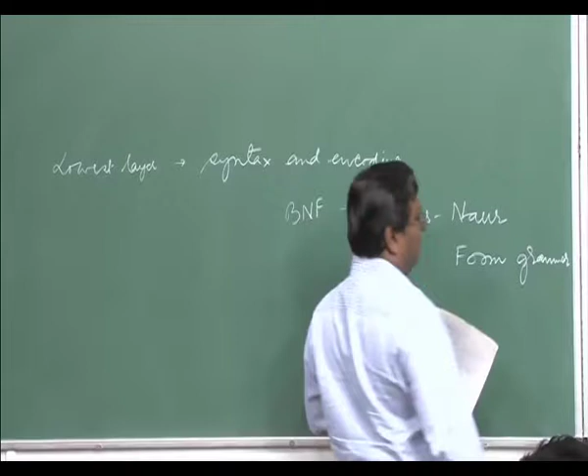So there is a generic definition, and this can be done through a grammar, and this grammar is known as BNF. It is something very similar to ASN, abstract syntax notation. Let me write down the proper spelling. So this is a formal way of specifying the syntax.

I will give an example of this. We will specify in our own way, and most likely that is BNF. Once you have this specification, at least you know how to form a request and how to form a response for every request. There can be multiple requests and multiple responses which are permitted.

So once this abstraction is clear, you know how the message will be formed. It's like how to write a letter. There will be Dear Sir, there will be address, there will be date, then you will write how are you, whatever it is, then you write whatever you want to say. After all that preamble, you will say thank you, goodbye, your name. It is a format, it is a syntax. You will be using English language or you will be using Urdu or Hindi.

That is a kind of encoding, how it will be depicted in text. You might write in Roman script but you are writing Hindi language, that is possible, we do that once in a while. So all that specification is given by this. So once the letter is written, closed, sealed, what has to be done with that?

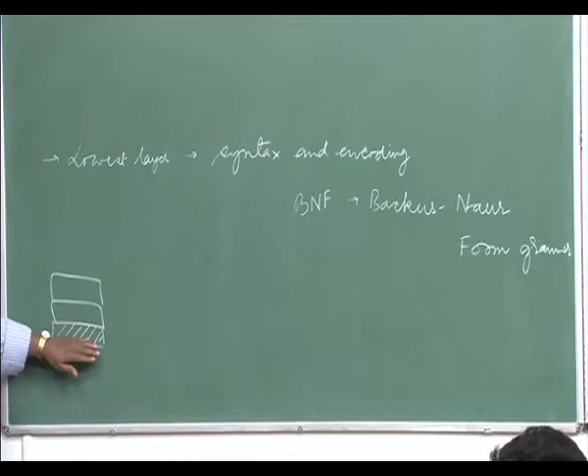So the next layer talks about how it will be transported. So the next layer will be transport. This is the lowest one, so next on top of it, layers are like this. Whatever functionality or abstraction is provided by it need not be known by this guy, this guy just passes on the information and this takes care of it. Actually this is the way it is going to happen.

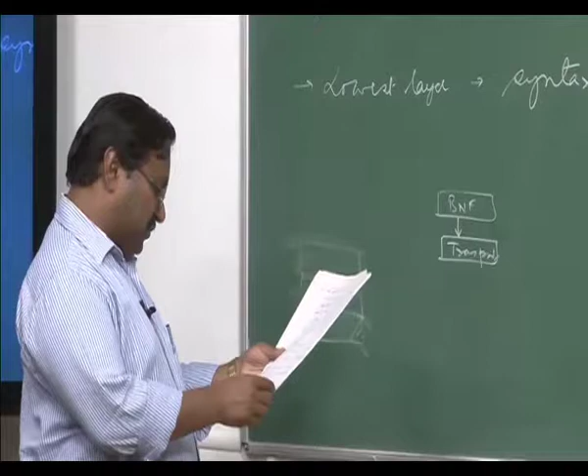Whatever you are going to generate with this BNF grammar specification, the message, this will be passed using a transport. So transport layer can be UDP, can be TCP, can be HTTP, or can be anything. It is basically the message being encapsulated and then being transported over to the other person. So it defines that particular transport, and similarly how the responses will be sent back. So this can be any one of those.

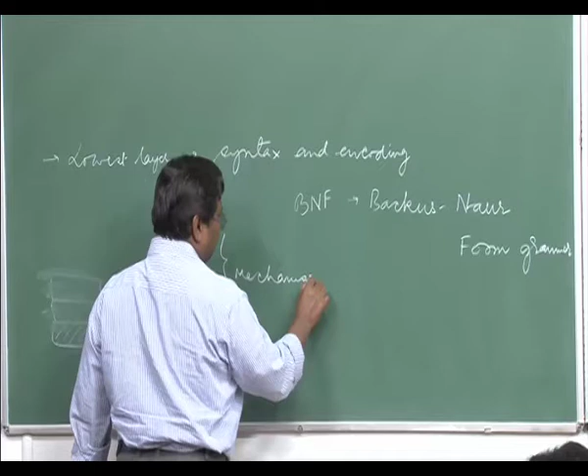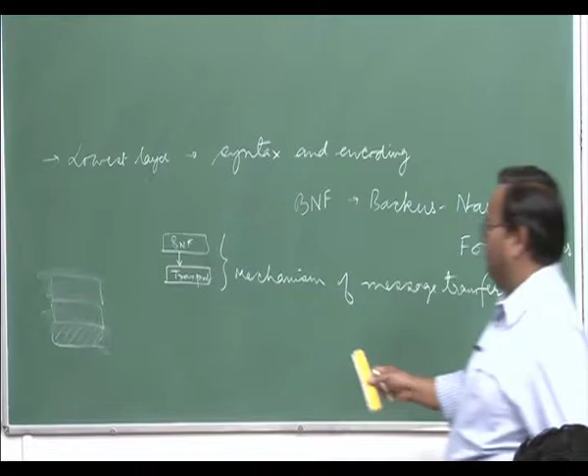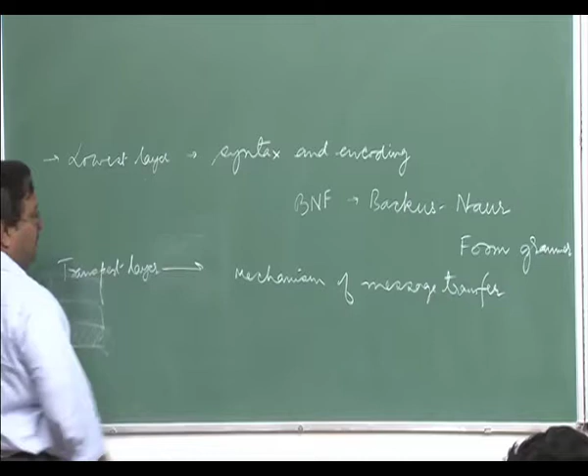This is basically the mechanism of how the message will be transported, how the message is formed, and how the message is transferred from one entity to another entity, that is the transport layer. I should not call it a lower layer because it is not running on top of it actually, because whatever you create, that becomes an entity for this. These two are separate, but that is the way it has been written, lowest and transport layer in RFC.

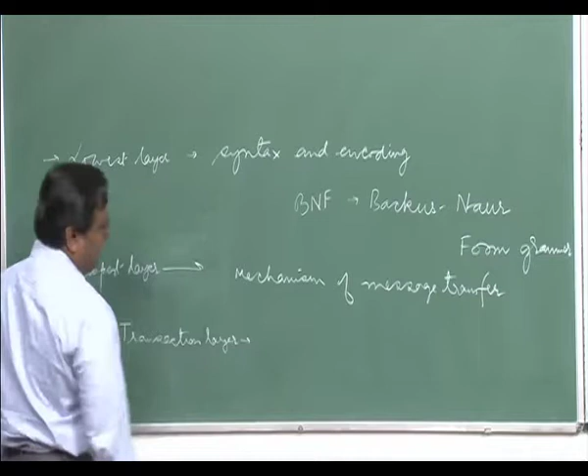Then there is a third layer. They do not write bottommost, upper layer kind of thing, the structure is not used the way it is used in networking. Third is what is known as the transaction layer. What does it mean? For any kind of signaling, any signaling will consist of multiple transactions.

Maybe I will send you an invite, the response will come for the first transaction, over. Based on that, I will decide on some other transaction which needs to be done. So every time there is one transaction which will happen fully. It is possible I do a transaction with you and you give responses, so that's a transaction running, and he on my behalf is now transacting with somebody else. So a client will be transacting with a SIP proxy, the SIP proxy will be transacting with another SIP proxy. Each transaction is separate, each transaction is independent, but they are initiated by an earlier transaction. What's the difference between transaction and message?

Transaction is a finite state machine. Once you transfer the message, how will you ensure reliability? Suppose I am transporting over UDP. UDP has no reliability. You send a message, created at the lowest layer through encoding into the message format, and send it over UDP using that transport. You have done the transaction, now you are waiting for the response, but the message is lost. What should you do?

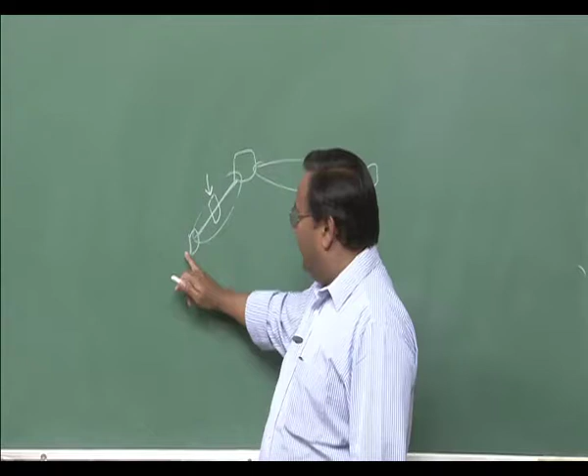Not necessarily, not necessarily. The transaction is point to point, yes, unless you have a stateless proxy in between, because any request sent through the transport will be transparently transmitted to the next guy. It does not maintain any state. If it is a transaction, then it will maintain the state of that.

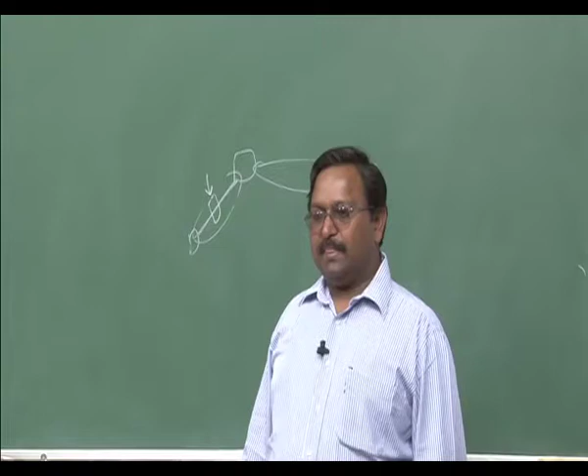Within a transaction, whenever you send messages, you are changing your state. When you get back the message or response for the transaction, you are changing the state. In the stateful proxy, there are two transactions: server transaction and client transaction. For stateless, there is no client and server. Whatever comes, it simply transfers, and whatever comes back, it simply transfers back.

On the other side, when it is forwarding the request, if the proxy is stateless, it cannot maintain a state. But when I'm talking about stateful, there is only one transaction, and it can result into another transaction coming here.

So for this side, there is a server, and there is a client here. There is a client here, there is a server here. So what transaction do we call it? Client transaction or server transaction? There is one client transaction, the other one is server transaction. Client transaction and server transaction are actually finite state machines, it's not one transaction.

The transaction layer is what is the third layer.

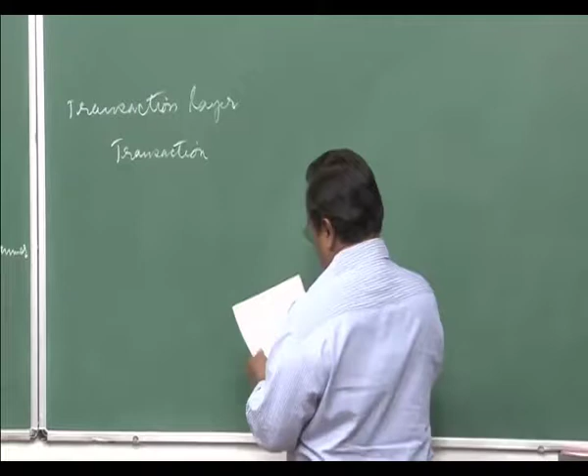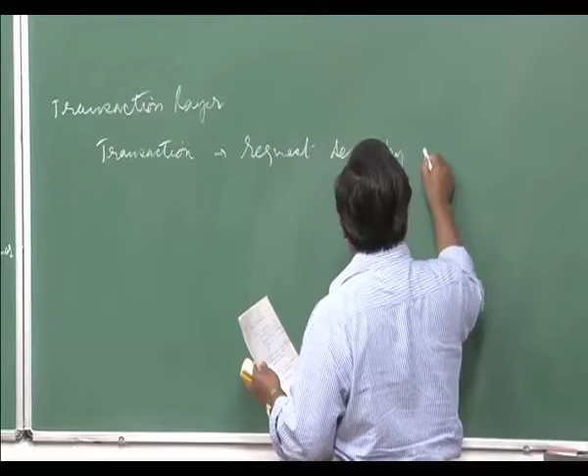And formally, transaction is defined as a request which is sent by the client. Transaction is an instance which gets created in the client. Okay, it's not a transaction itself, rather the client transaction is an entity running in the client. Similarly, there is a server transaction. So a request is going from the client transaction, which will cause a state to be changed.

So if loss happens, it has to be retransmitted after a certain timeout. Reliability is the responsibility of this, irrespective of what kind of transport is used. Transport can be anything, remember. If it is TCP, most likely it is reliable; with UDP it is not reliable. Remember when I took the Bob and Alice example, it was a UDP based transaction in that request response, and the message could have been lost in UDP.

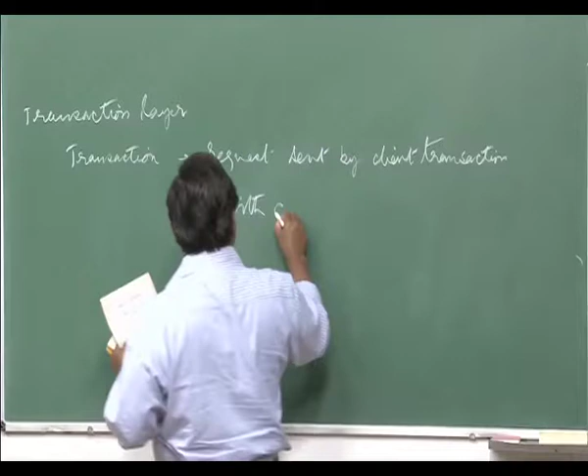What will you do in that case? The client transaction will remember that the response has not come within a certain time, so it has to retransmit the transaction request. So a transaction is a request sent by the client transaction, along with all the responses received, not just one response. The client transaction sends a request, then all responses that come will be included, and this whole thing together will form a transaction.

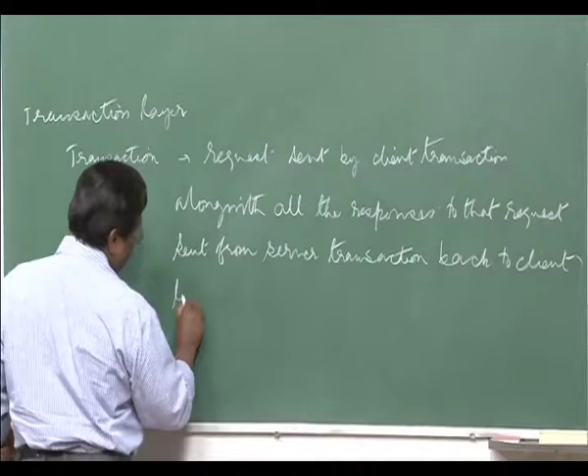And this is sent using the transport layer. It is a different kind of abstraction, not exactly the same way, so it takes care of reliability.

But when you implement a client transaction, there is a finite state machine maintained for that. Remember for the data link layer we had a finite state machine on two sides which can take care of the reliability of message transfer. In case a message is lost, you will time out and retransmit again. Message sequencing can also be taken care of.

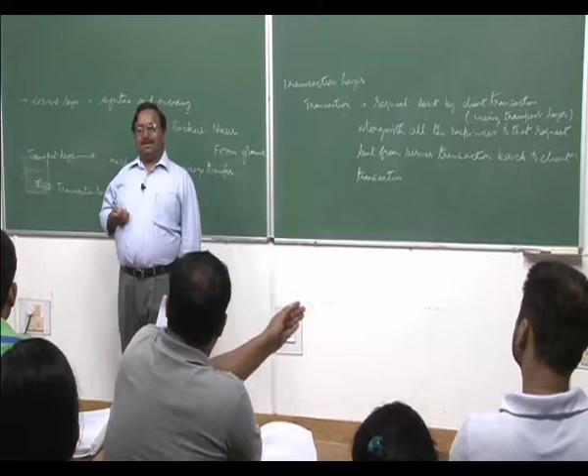When any server, suppose a stateful proxy, is acting both as client and server, it generates the request and sends it to the other side. It is going to have a transaction user sitting inside. When it returns the response, when it receives the response, how does it know this is the response of this particular transaction? When I send a request, the proxy forwards the request and we will receive the response. There is a dialog, and there is a corresponding sequence number for the command.

A dialog gives the complete picture of everything happening for that call setup, and the command sequence tells which transaction corresponds to which command. For each command, one transaction is created, but a transaction user can issue multiple commands. So the layer on top of it is the transaction user.

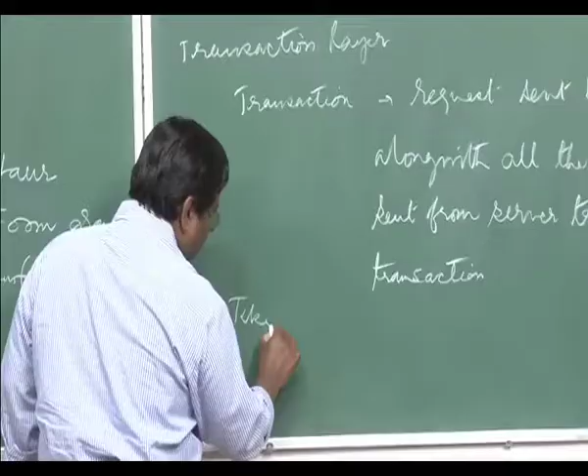This layer handles all application retransmissions, matching of responses to requests, and application layer timeouts. This is important because otherwise there is no reliability built in, since the application can actually use UDP. So the responsibility for retransmission lies with this transaction layer.

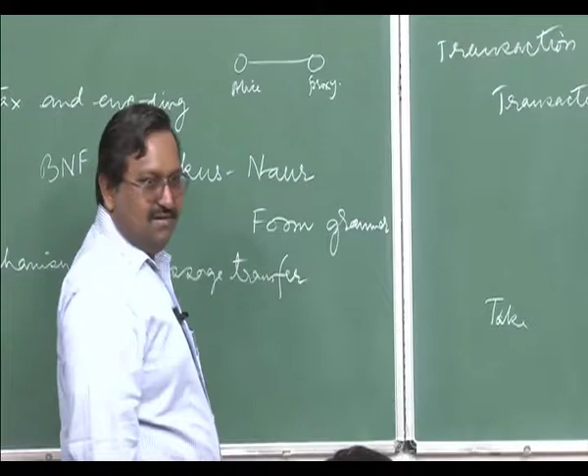The transaction layer exists in the proxy, or everywhere. A transaction is between two endpoints. It's not between Alice and Bob directly, it's between Alice and the proxy, say the Atlanta proxy, and there is a transaction running between them. Similarly, between this proxy and another proxy, there is another transaction, and between that proxy and Bob, there is yet another transaction running.

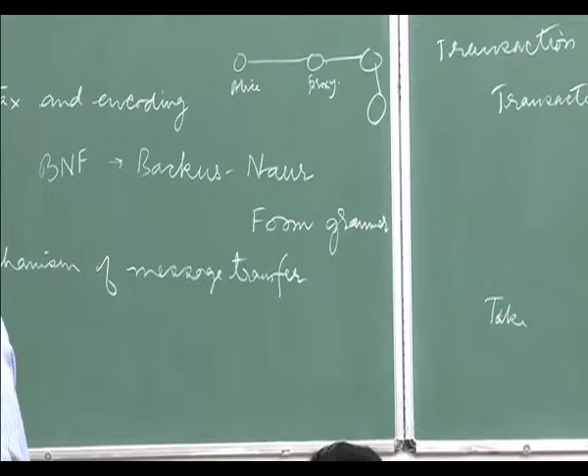So who will realize that they have to retransmit? Alice will realize she has to retransmit here. This will realize retransmission of the message here, and this will realize it for this section.

So this transaction user has to talk to the other transaction user, and for that it creates a transaction layer—a transaction gets created. A transaction instance is created for the invite, and this goes here, creating what we call a client transaction. A server transaction also gets created, which then sends a response, for example '100 Trying', and then gives that message to the transaction user. This server transaction remains active, it's not dead—its transaction is not over.

The transaction user will now know it is a proxy and has to forward the message appropriately. So the transaction user tries to find out which is the other proxy to send the message to further. My question is, when retransmission of the message is done by Alice, will this retransmission message be further forwarded by the proxy? No—when you have a proxy, that doesn't happen.

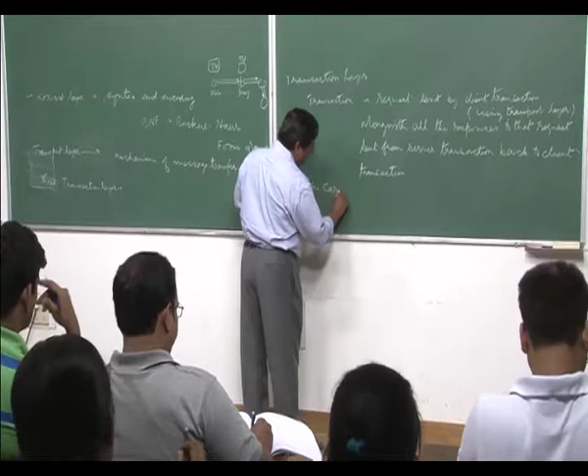So whatever comes, you simply change the header as per the policy and transfer it. You don't even worry about what has happened, what has not happened. It's the endpoints which will worry if it is lost or if a wrong translation has been done. Reverse, whatever comes, you again do the translation and pass it back. So they actually handle what we call application layer retransmission.

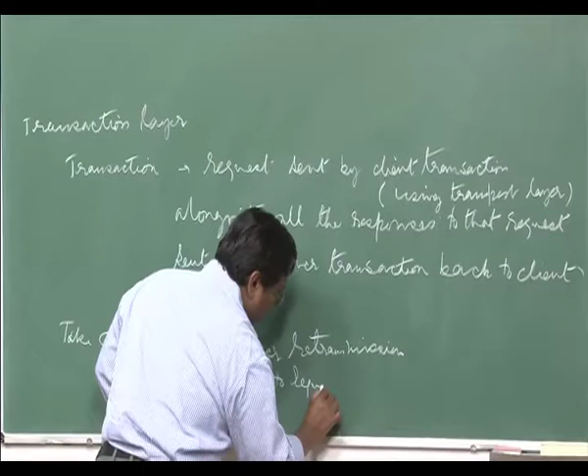I think I will write it. Then matching of responses. Each request will have a separate client transaction being created. So when the responses come back, they are transferred to the appropriate client transactions.

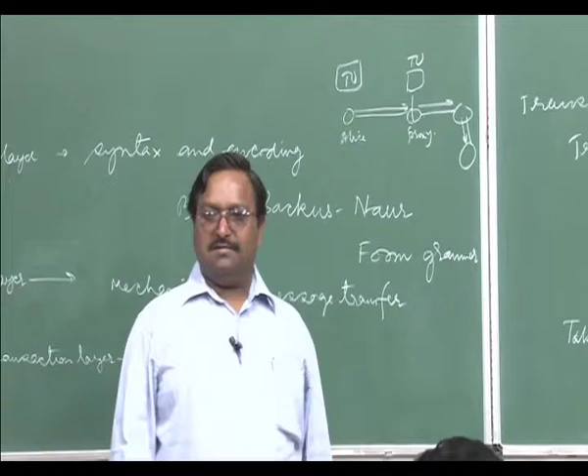Controller of all transactions is the transaction user. So in case if I am a client and I want to set up 5 connections, there will be one transaction user and there will be 5 transaction layers which will be initially set up.

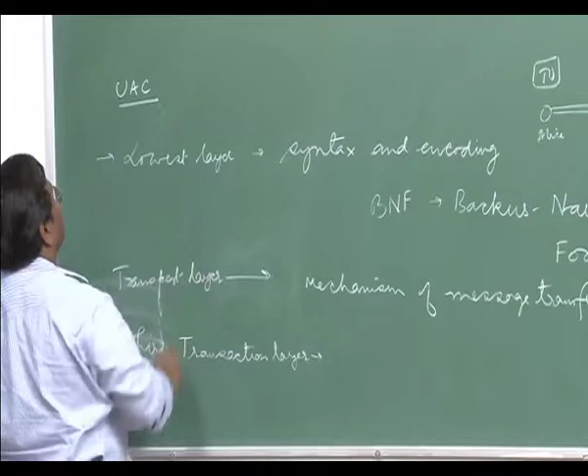And of course, what we call application layer timeouts. So any what we call UAC, UAC was user agent client, and whatever it will do, it will be through a series of transactions. So UACs as well as, this will always be working through a series of transactions.

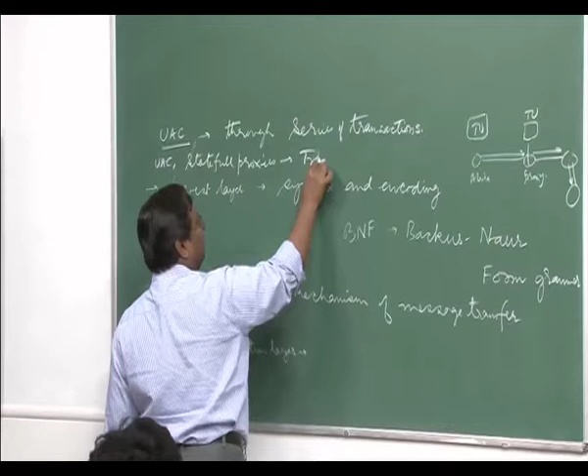So now it's important that UAC and stateful proxies have a transaction layer. In fact, I should write transaction because TL is used mostly for transport layer. Stateless proxy has no transaction layer. And of course, all the time, this client transaction and server transaction

they are always represented by a finite state machine. A finite state machine is where finite states are there, and depending on whatever the input is, the state will change, and there will be a corresponding output which will be coming out. FSM is that. FSM stands for finite state machine.

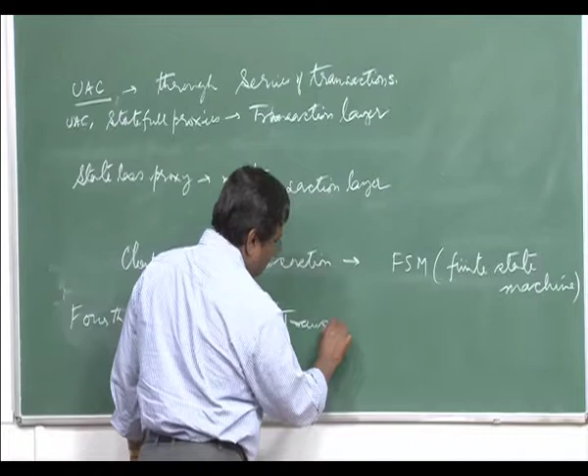And of course, the fourth layer, as I mentioned, is always going to be transaction user. This is known as TU, transaction user. This is a user which is technically software running there, which creates transaction machines, client transactions and server transactions.

Except the stateless proxy, all SIP entities are transaction users. There is no separate thing, all entities itself are transaction users. So proxy is a transaction user, nothing inside the proxy itself is the transaction user. User agent client is itself a transaction user because it creates transactions. Proxy also does the same thing, registrar also does the same thing. So except stateless proxies, every other entity is a transaction user.

So the way it is going to be done is, it will create a client transaction, and for this it will create a client transaction instance. Actually there can be multiple client transaction instances, as he has mentioned as a case. If you want to make multiple calls or multiple invites to be sent, you will create a separate instance for every kind of thing. I already gave an example: you create an invite, you create a client transaction instance; you want to cancel it, you will create another client transaction instance in that case, which will refer back to this, because it is a cancel, it is a separate transaction, but it refers to an earlier transaction.

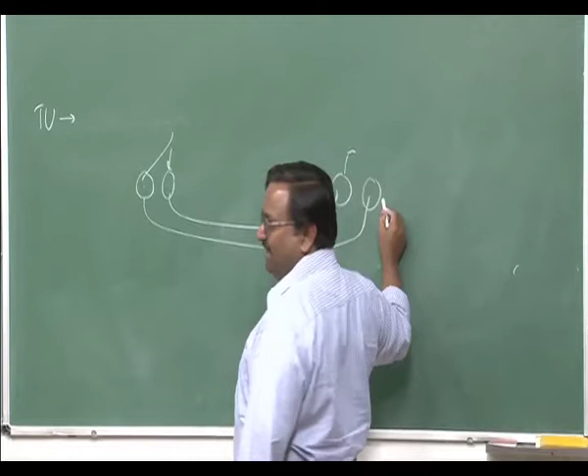So you create a transaction which is an invite, for example, on the server side. Suddenly you want to cancel it - you don't cancel it directly, you start a separate transaction which creates a cancel server transaction. A reference is given to this, so this knows from that reference that this has to be cancelled. This will be cleared off, the response will come back. Once the response comes back, you will clear this thing, you will tell TU, and this will clear off this one.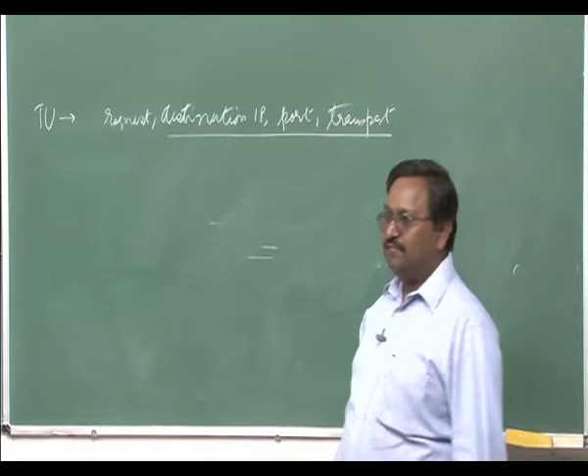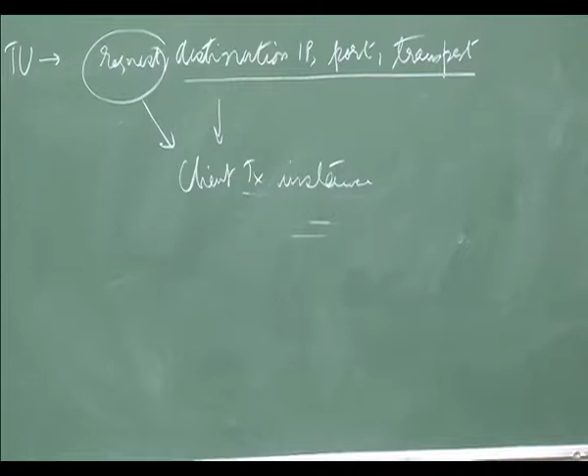This will always lead to the creation of a client transaction instance. The transaction instance will be of the type request, and the message will be transported to an entity on this side, where the server will keep on waiting. The moment a request comes, it will check, find out there is no server instance for this, and it will create a server instance. It's like forking - for example, whenever you do telnet or SSH to a server, there is only one server running there. The first time the request goes, it figures out there is no instance running, so it will actually do a fork. Fork is creating a copy of yourself, and that will be made responsible for responding to this.

So you will create a server transaction instance. This will be done exactly the same way it is done in the network - you will create an instance on the server side also. The cancel thing I have already told you, and of course this is basically the layers which will be used for communication purposes.

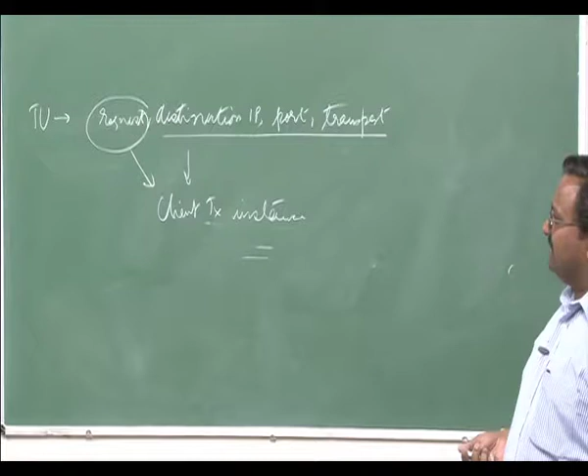Now, most of these SIP elements we define something called core. Core is the functionality. Of course this is only an abstraction, it does not mean software has to be designed only in this way - you can design your software whatever way you feel comfortable, but this is an abstraction given in the RFC. So you assume that if somebody else designs software in whatever way, but follows this abstraction, you should be able to communicate with them. Only that has to be ensured by you. You don't know how the other person, server, or SIP entity has been implemented. So you have to ensure, if you are making a client, it should be able to work with anybody's proxy which is SIP compliant. If you are designing a proxy, it should be able to talk with any other proxy built by anybody else, or any client. Registrar should be able to talk with any kind of proxy.

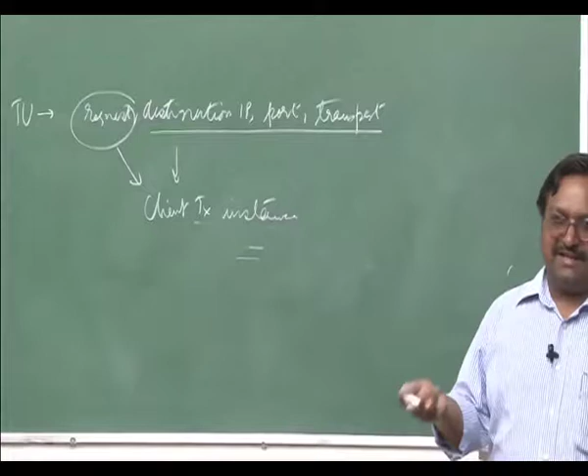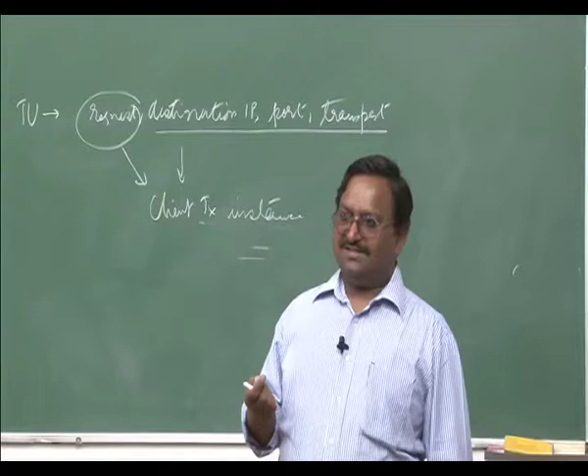But internally how you implement, that's the implementer's issue. IETF should not govern that, because that innovation we should leave to the inventors. You can do a lot of innovation by implementing the software itself.

So in fact every entity, every SIP element, we define core actually in this case. Core is the implementation. Core technically represents the TU, client transaction instance creation mechanism, client transaction instance, everything put together in software. That is core. And this will exist for every entity except the stateless proxy. So that is core.

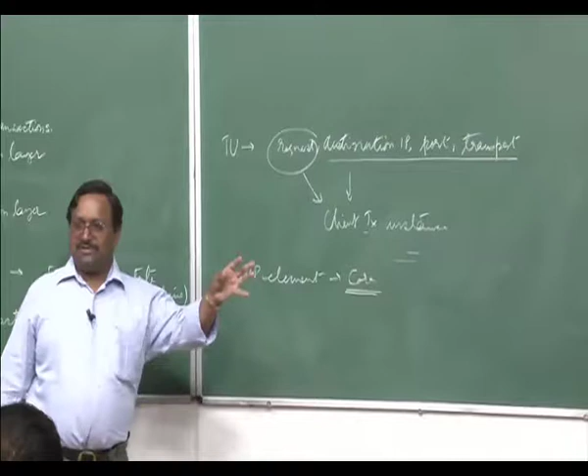And core will depend on whether it's a proxy core, or whether it's a user agent client core, or a user agent server core, or it can be a registrar core. So you can define, or you can have a redirection server, it can be a core for that as well.

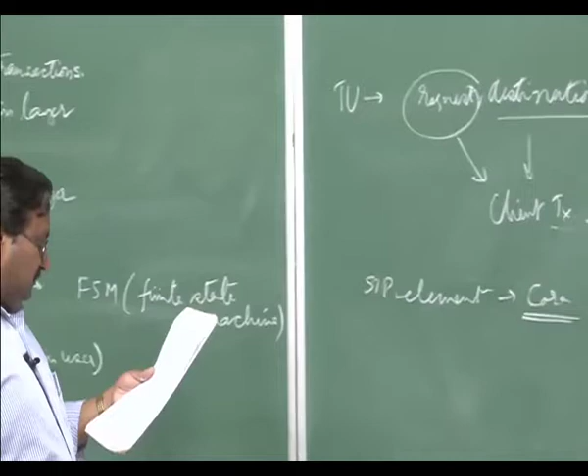And remember, for every transaction, it will get completed when you get a final response. It cannot be completed before you get a final response. So client transaction and server transaction will get completed, then this server entity can go away if it requires. This will happen only when the final response has been received for a request.

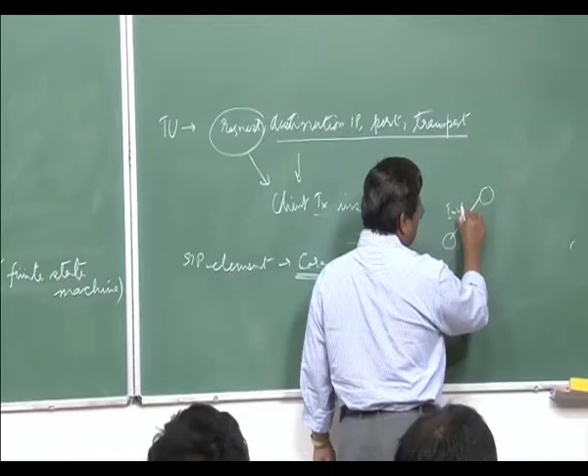So now if you carefully note, when the UA has sent a request, there was an invite which was sent. The final transaction happens, final response comes only when the final responses from all others have reached here. Then only you get an OK. An OK is a kind of final response. In fact all response codes starting with 2xx, 3xx, 4xx, 5xx and 6xx are all final responses.

1XX is not a final response. It is a kind of temporary response. You call it provisional, and it will not terminate the transaction. So your client transaction has to be maintained if you are getting these provisional responses. You cannot terminate it, you cannot close it. The 1XX series will not close the client transaction. Only something related to the final response will close it.

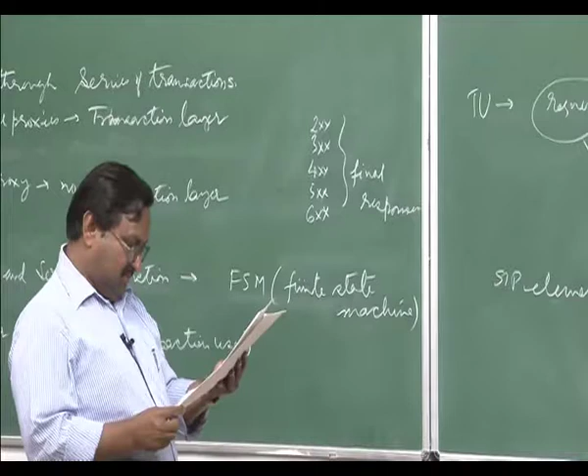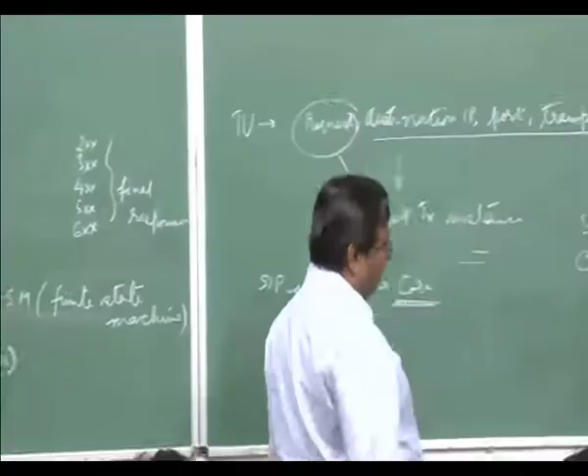Now these requests and responses can keep on moving from one person to another and so on. So there are terms for things which can happen, which we define. One thing which can happen is known as a loop.

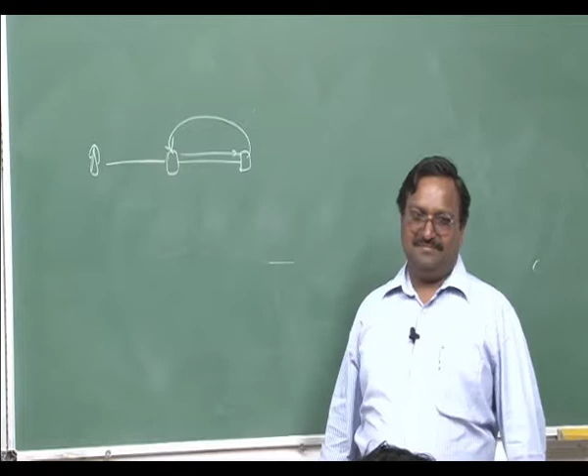So this is a SIP phone, talking to a proxy. The proxy figures out the transaction is not over. This request is sent to another proxy. This proxy analyzes the invite or whatever request was sent, and this request comes back to this guy, and again goes back in this direction. That's very important - then it is known as a loop which is going to happen. So this is a loop.

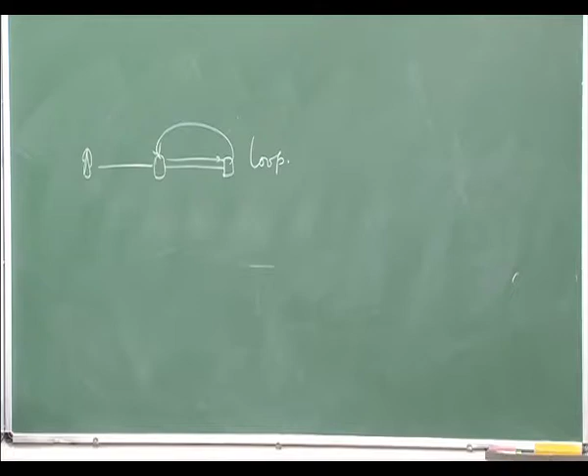Another interesting thing which can happen: you send a request to a proxy, this sends it to another proxy, this in turn sends it back, but this new request which has come back through some way - there can be other proxies also - is not going to go in the same way, it goes to somebody else. So this is different than a loop actually. This can happen because of redirection.

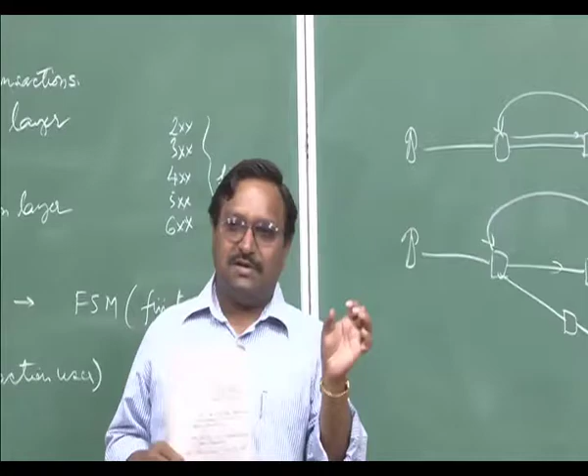Because you are probably registered with this domain, but then you have moved to some other place, so you told this guy, tell this person where I am. So it tells this person that I am here, and it passes on the request to this guy. This guy then looks - because remember that SIP proxies, when I do redirection, the original destination is mapped to another new destination. So Bob was at biloxi.com and then he has moved to say xyz at atlanta.com. So that's a redirection. Atlanta.com is back here, so the request comes here for xyz, or maybe some other guy whom this guy cannot go directly to - it comes back here, which in turn sends the response request here. This kind of thing is known as a spiral.

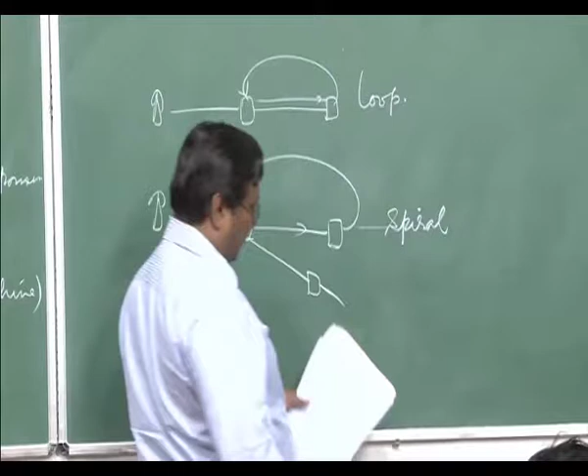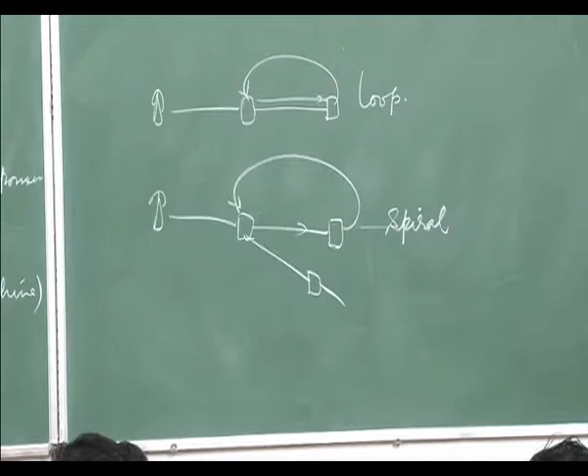But this is a legitimate entity, this is legitimate. A loop will be endless, or I mean it will come out - it depends. A loop usually is not desirable, but yes, it is possible. If a loop is there and it is legitimate, yes, it is possible.

That's why we put loops - they need to be resolved in that case. Probably one example is Bob at biloxi.com.

His job actually got moved, so he still retained that account. He did a redirection - he joined somewhere as say Johnny at atlanta.com. So the call was redirected here, and then by the time he also actually has moved, this entry is still retained, and now he is Jojo at biloxi.com. So it's being again redirected here. So loop is a still valid thing, but the signaling is happening in the loop. So ideally speaking, the error here is that he should have now told this guy that whatever is Bob at biloxi.com is same as Jojo at biloxi.com.

So redirection can happen here itself directly. Earlier this loop is nothing but what we call a data which is not required, a configuration which is bad actually. Of course it's not going to impact, the call can still be routed, but it's not desirable. Mostly it will happen because of redirection, because for whatever reasons this redirection is probably you are moving and then you are even retaining your earlier account and redirecting to somebody else, like dot forward in email.

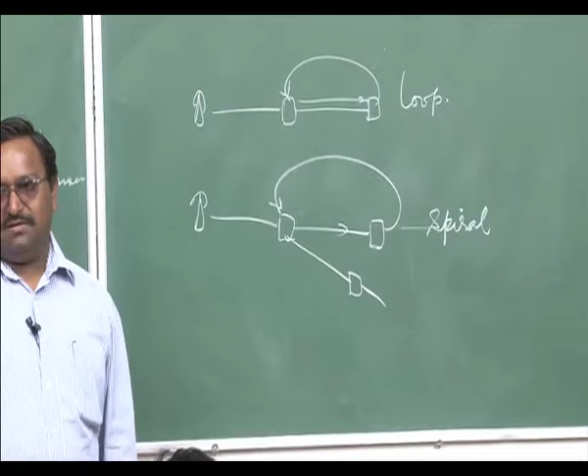This will be, sir, since in GSM we are having that roaming concept, so same concept will be here. So they'll have to do it. They have to do it, but if these machines are entities, they can figure out a call leg - not call leg, that's dialogue. But dialogue is not there unless you get the response back, because this will be of different network provider. So only the invite will go in this way, but the response will come pretty fast.

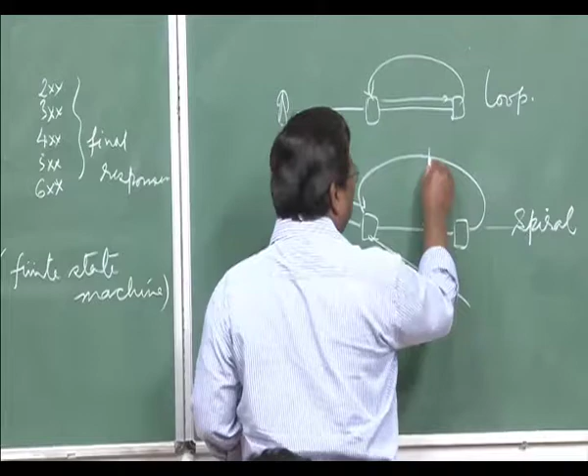Basically, they will always say they will not put what we call that thing, the via field. So whenever you are doing redirection, don't put a via header entry into that. But the problem is, if this is going to send to another proxy, then this will not know it is going to go back to this guy. And it puts a via header, then it becomes a problem.

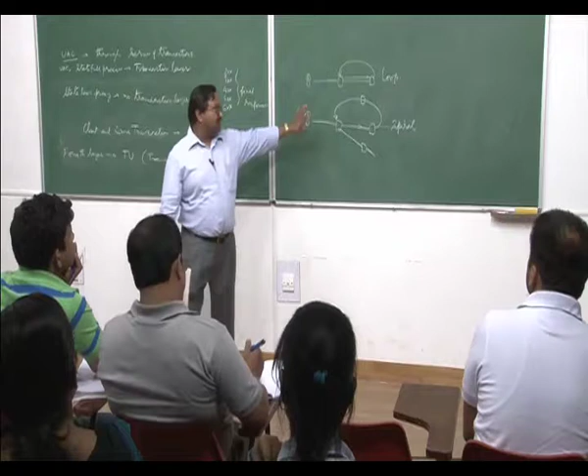Now those complications are there and we have to live with those. These kind of things have to be identified by processing, because this will not be cleared, remember. So whenever a new invite comes, whatever current transactions are pending and not clear, you compare with all of them, and based on that you decide if something is being duplicated. You identify loops or something, and then talk with those proxy servers directly and resolve the matter. So that intelligence has to be part of the proxy design. It's not a trivial thing, not an obvious stuff.

Now I talked about that back-to-back user agent, stateless proxy, stateful proxy. I can now diagrammatically represent them once I've come up with this transaction stuff. I talked about this B2B user agent. So this is a special kind of proxying thing, but actually it is not a proxy. Proxy is only for signaling.

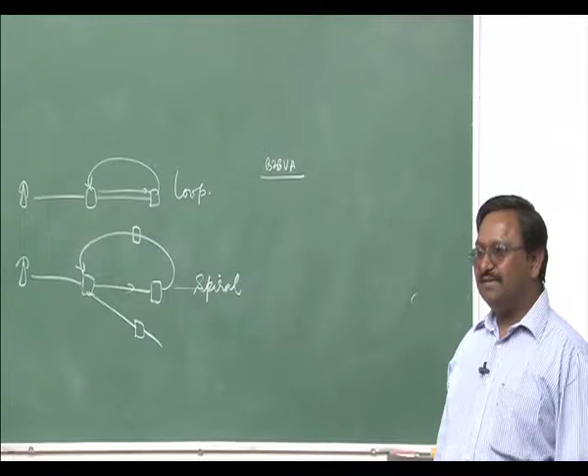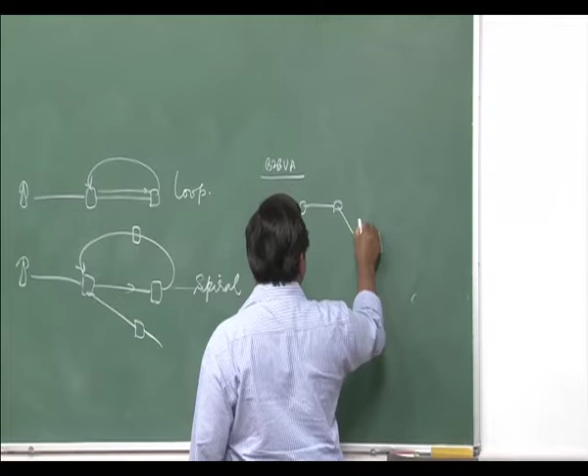Back-to-back user agent also takes care of media. So there is a proxy, and this is a B2B user agent. Media is going to be transacted on this path, signaling through this particular path. So there's one user agent, another user agent client, user agent server. Media and signaling both will be transacted here, and this can make another SIP trapezoid. That's a back-to-back user agent. If it would have been the proxy, the media is always transacted directly between these.

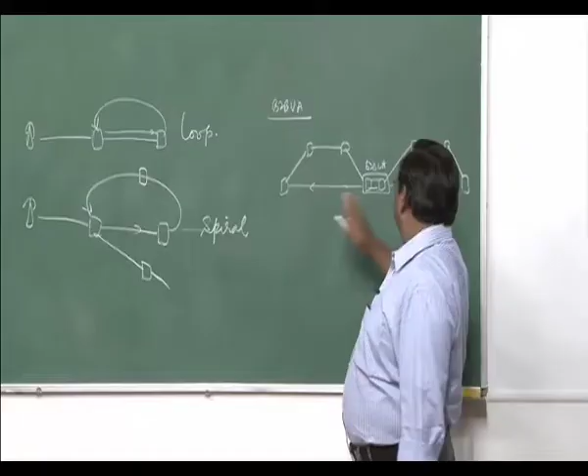Certain media gateways can be built of this kind, for signaling and data, or media as we call it. This will not be called a proxy. This is not a proxy, this is a back-to-back user agent. How can you differentiate if it is communicated? Proxy is only for the signaling part, it has no role for media. Media is transacted directly between peers, but this is like another peer. So this guy cannot see this and this guy cannot see this. They both have to go through this for signaling as well as media. This is kind of a media gateway.

So what advantage do you get? If you want to tap the call along with all signaling information, yeah, this is the best approach. Back-to-back user agent is the best approach in that case. So don't allow the call to be set up directly between these two entities, use B2B UA. Tapping usually will require this, because now I'm not using Megaco for controlling this media gateway entity, I'm using SIP only. So you will actually see your user as if it's this, but actually it is not. Similarly this guy will feel as if this guy is here, but actually he is not. They are just back-to-back connected, spliced together in software.

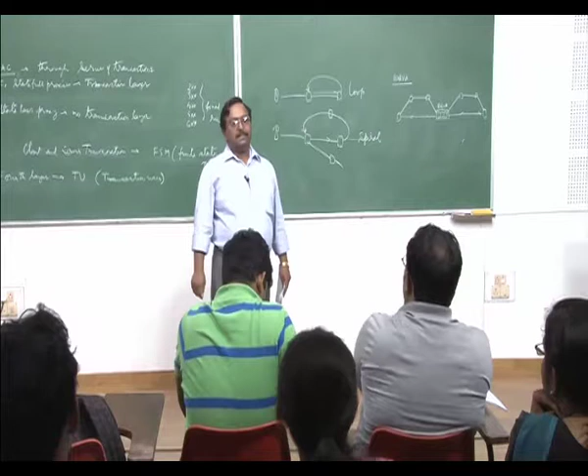Sir, how is this different from forking? Forking we also do when a normal response comes and we need to go to another path, are we doing forking there too, can we use forking also? Forking is when the proxy on the receiver side gets the message, and now signals to many entities, not one entity, which are registered for the same user. This is parallel forking. It's a parallel thing, and the responses will come from all of them, and it will intelligently figure out as per the policy that only one of the messages has to be passed back. So when do we do parallel forking and when do we do sequential forking?

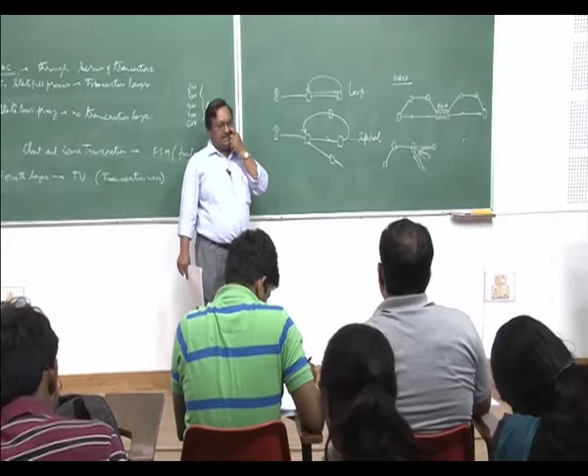Parallel forking, for example, if you set it up as a feature with your registrar, you want that all three of your phones should ring when a call comes, and you can pick up from any one of those. You can say, try my home phone first, give 4 rings, if I don't pick up, then my office phone should ring for 4 rings, if it's still not picked up, then my mobile should ring. That's sequential. You can also use a mixed approach. Yes, you can. Everything has to be registered with the registrar, and it will get everything from the registrar and act accordingly. So the policy of calling is again left to the implementer and users. RFC does not define that. In fact, there are many sets of RFCs; other RFCs talk about this thing. It's a user's choice, it's a policy.

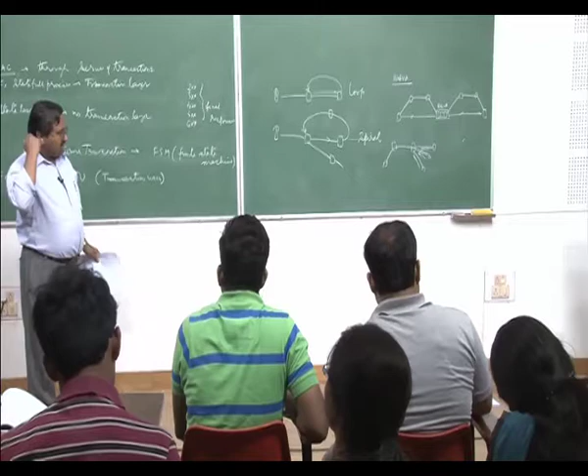So next is the message format. This I have already mentioned, but I am just formally writing that now. This should not take much time.

A generic message will always look like this. I am now writing the grammar of it. It will always consist of a start line, optional headers which will be there, CRLF (carriage return line feed), a gap, and then you will have the message body which is optional.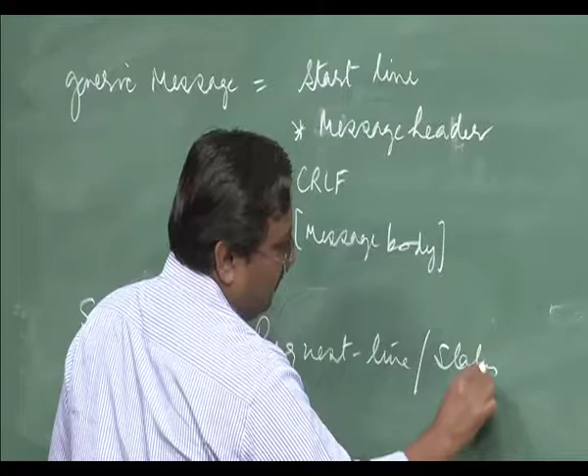I think optional is with this, and this is a compulsory thing. Flexible. A start line can be either a request line or a status line. Even when message body is not there, this is optional, but CRLF is compulsory, start line is compulsory.

This is a variable field actually, message header, they have to be there. Message body is optional. This is a variable number of lines, the end of the header will be identified by CRLF, which is again a compulsory thing. You cannot identify the end of the header fields unless this is there, so that always has to be present. That is the BNF grammar which I am writing now.

The request line will look like this - now these are two options, request line or response line. So request line will be a method, then a space. I have already mentioned this earlier, but now I am writing it formally. Then there will be the request URI, a space, single space character, and then of course the SIP version and CRLF - carriage return line feed. You will come back to the first thing.

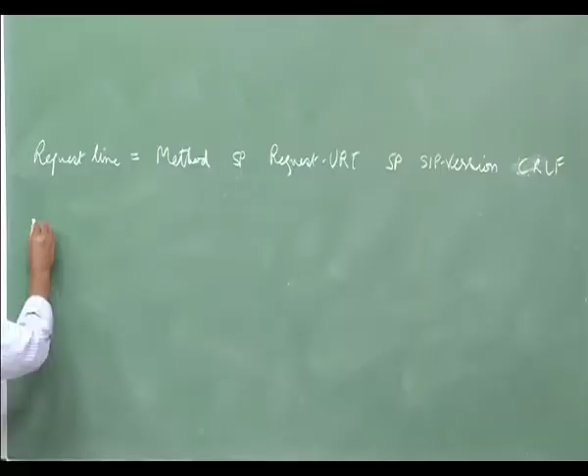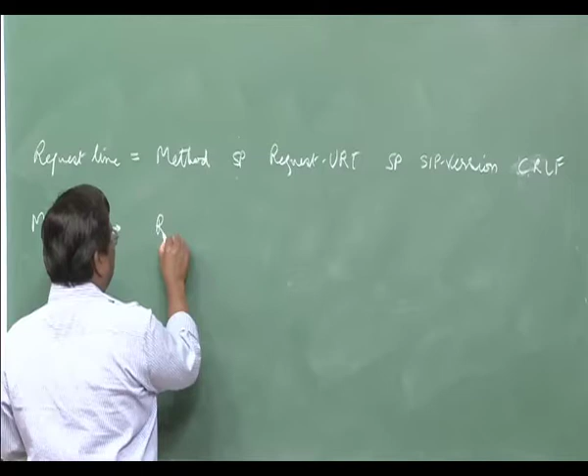So the methods which are permitted - so far I have not talked about all methods. All the methods which are there are these, which can go in any SIP request. One is REGISTER. INVITE, we all know what is invite. We also know what is ACK. It is not a response, remember, it is a method in the request.

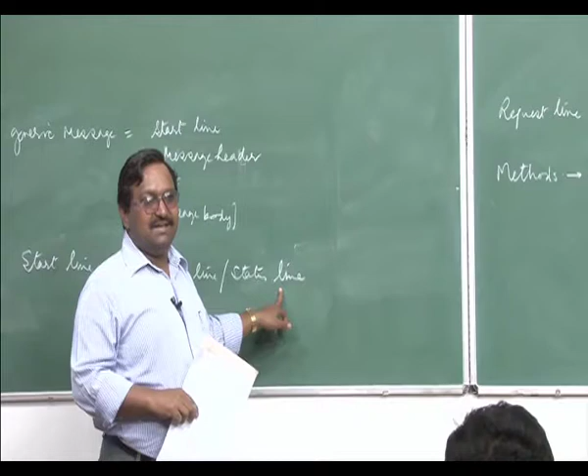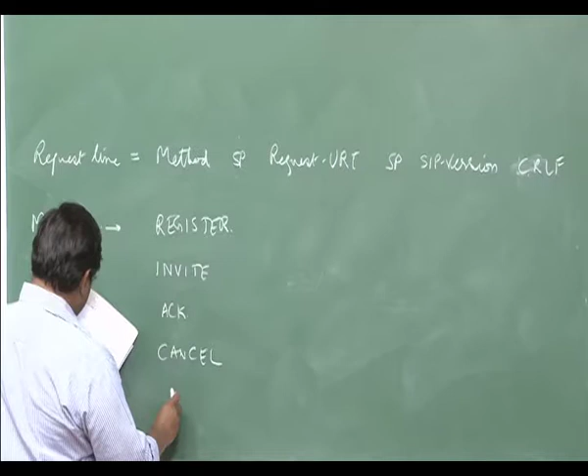In the request line, status line is where the OK will come. So ACK is not a response, ACK is a request. Then there is CANCEL. BYE. OPTIONS.

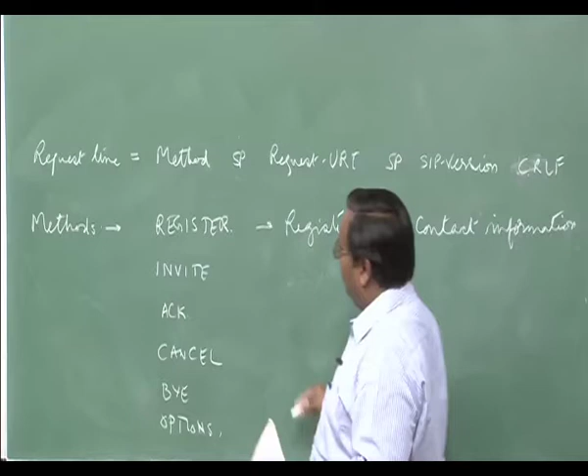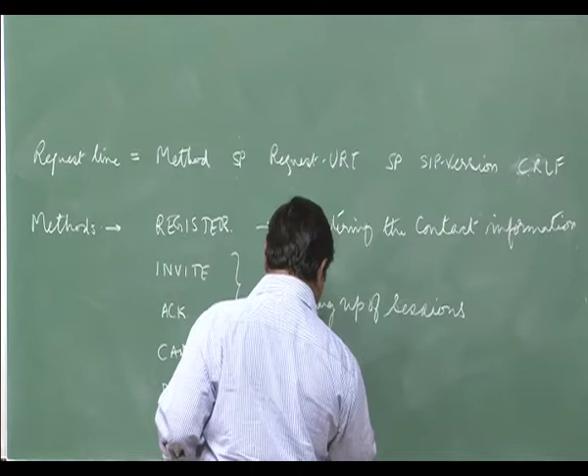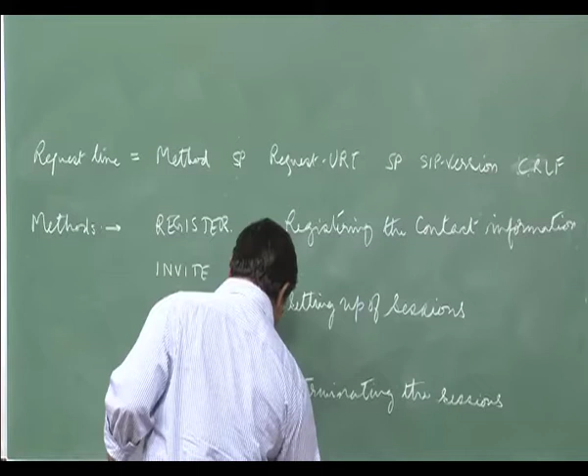REGISTER is used for registering the contact information. INVITE is used for setting up of your sessions. BYE is for terminating the sessions. OPTIONS is for querying the servers for their capabilities.

So this is as per RFC 3261. Other RFCs also specify other methods, but these are the ones which are required by every implementation. Other things are nothing but SIP extensions actually. There are other methods also.

What's this asterisk? All variable length, variable number of headers. It's not one line, there can be multiple lines, which include the Via header field. That's why CRLF is there - you identify, our first line is this line, and this CRLF, all lines in between them is message header. So it can be one line, it can be 2, it can be 10, it can be 20, nobody stops.

One of the fields will always be content length, which will define what is the message body size. There is no CRC in this case - that's taken care of by UDP or IP packet or data link control. So usually if there is going to be noise, DLC will take care of that and will do the retransmission. What's the difference between setting up a session and managing the session?

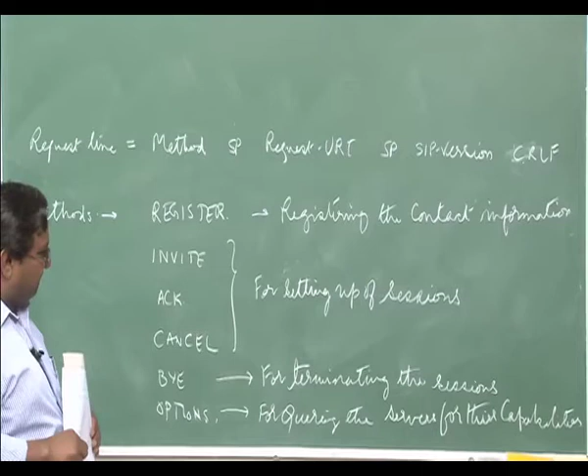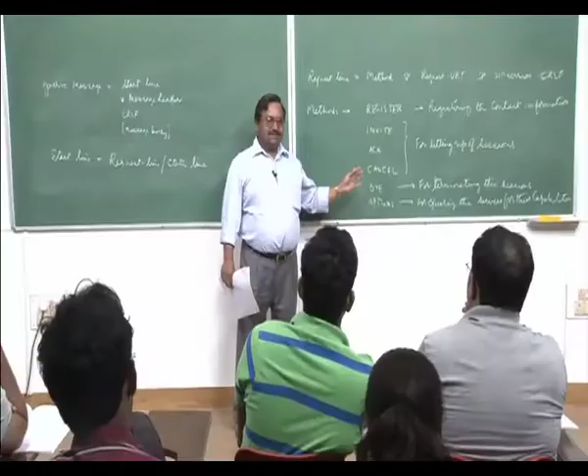Here is the setting - this request will take care of the setting of the session. This is for setting up sessions. So what's session management then? Session management, if you do re-invite, that is also again the invite command only, but with different parameters. Session management will be transfer and termination only - modification of parameters also, and termination, everything. This, BYE, is for management, or you change the parameters of the media.